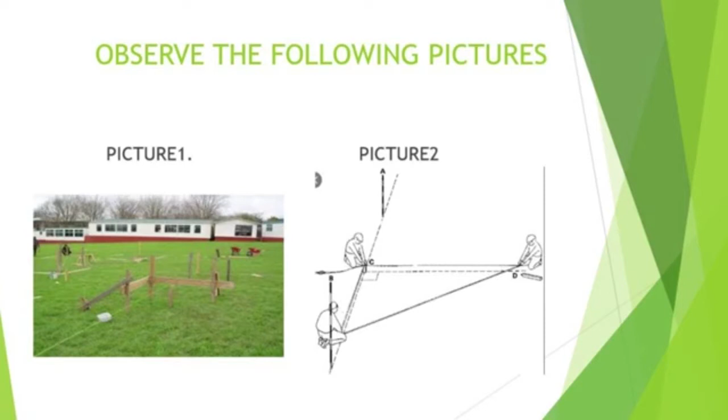Now, observe this picture in order to discover the topic of today. Here there is picture 1 and picture 2. Observe well in order to discover the topic of today. Here there is a question to answer. What have you seen on the picture? This is the first question. The second, what are they doing? On the picture, there was the pupil who is making some process. What are they doing? Can you guess the topic of today?

Now, this is the topic of today. You see that we are on the module of building setting out, competence of setup of a building. We are now on learning unit 2 called set profile. Learning outcome 5, demarcate foundation pegs and line. And the topic 1 of method used in setting out a building. Now the topic of today is set out right angle using 3-4-5 method used in setting out a building on the site.

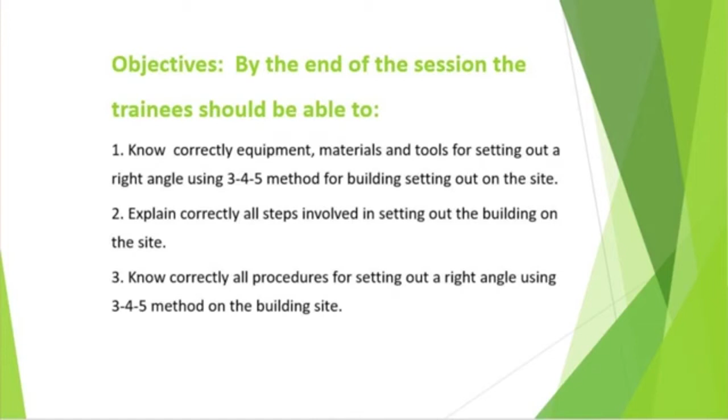So we have the objective of this session. By the end of the session, all trainees should be able to, first, know correctly equipment, material, and tools for setting out a right angle using 3-4-5 method for the building setting out on the site. The second is explain correctly all steps involved in setting out the building on the site. The third is know correctly all procedure for setting out right angle using 3-4-5 method on the building site. So I wish each trainee to cover these objectives at the end of this session.

Remember, our topic of today is to set out the building using a 3-4-5 method. Now, you can ask, what is a 3-4-5 method? There are other methods used for setting a right angle for the building, but here we have the 3-4-5 method. The 3-4-5 method is the method based on the Pythagoras theorem, a triangle. When you say Pythagoras theorem, first you must understand the triangle.

It means if one side has 3, another has 4, and the other has 5, here it is a right angle. So there is no need of using a building square, but you can use this measurement to have a right angle of your building. You set 3 at one side and 4 at the other side. Then the diagonal side will give you 5 units. The units can be meter, inch, or feet, in metric or British system. So if you use this method, you get a right angle of the building without using any other instrument. It is a matter of calculation.

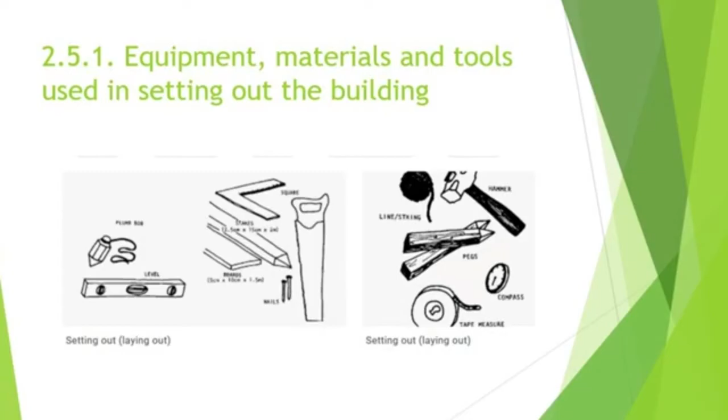So, equipment, material, and tools used in setting out the building. Here there is equipment, material, tools used in setting out a building. As you see on the picture, when we are going to set out the building, you must have several tools, material, and equipment. As you see there, building square, spirit level, pegs, tape measure, and so on.

But when you set out the building, you will cover several steps. Here, there is a general step involved for setting out a building. The first step is establish the baseline. This is the key step for setting out the building. As we will see, the baseline must be taken in the direction of the road or the neighboring building.

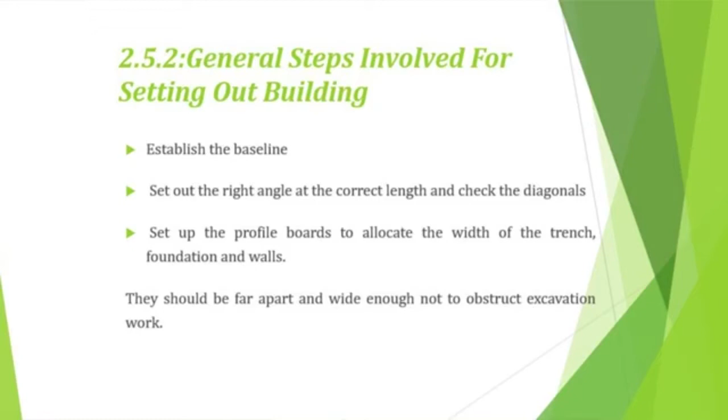The second is set out right angle at the correct length and check the diagonal. Then set up the profile board to allocate the width of the trench, foundation, and the wall. On the profile board, you have also to put the width of the trench, width of the foundation, and the width of the wall. Those are the essential elements that you must put on the profile board.

So here, there is a detailed step for setting out the building. The first step, you remember, is to set the baseline. The baseline is measured from the road. The baseline is often the building line. Remember, the building line is set by the planner or planning department of the local authority. You don't have permission to construct close to the road.

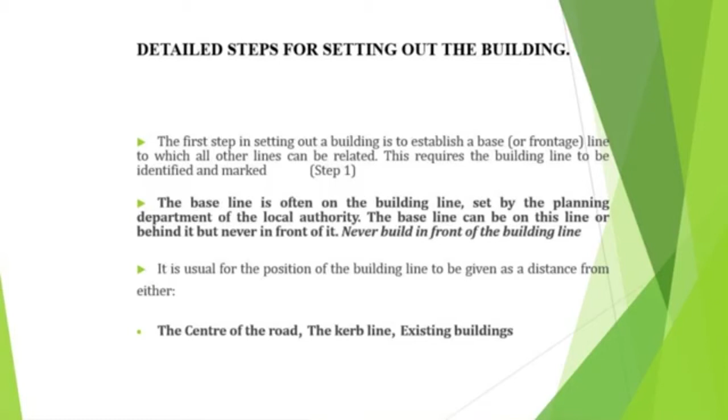So there is a planner which has the task of making decisions about the building line from the road, sometimes called setback distance. Never build in front of the building line.

You see here, it is usual for the position of the building line to be given as a distance from either the center line of the road, the curb, or an existing building. If there is no road, you must make a setback distance from the existing building.

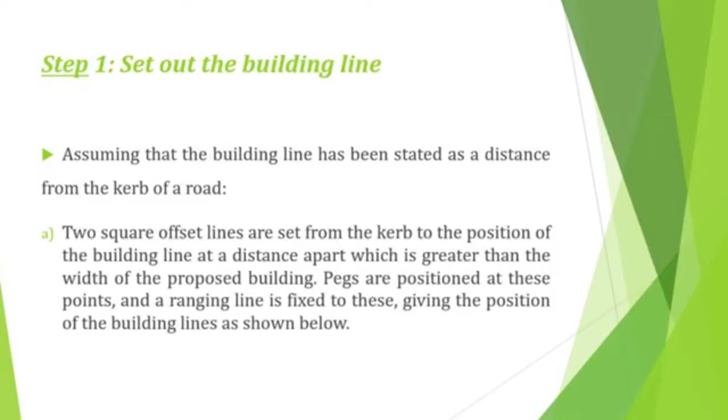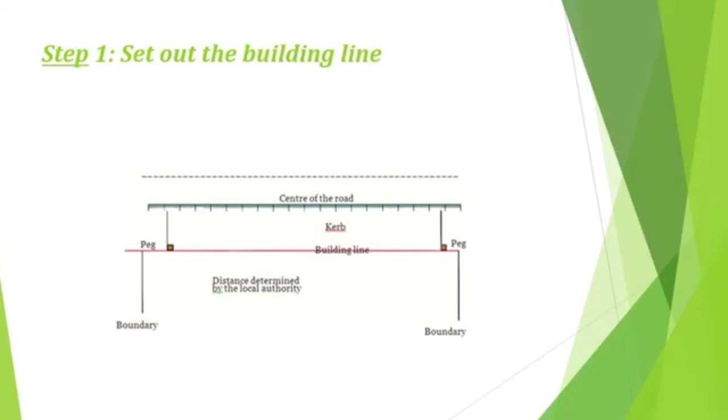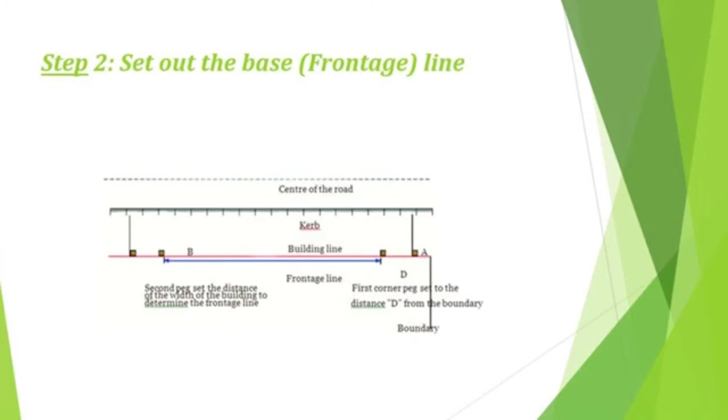Remember, step 1 is set out the building line. As you see there, the center line of the road, the curb, as I have said on this figure, it is the same. Then step 2 is set out the base or frontage line.

On the building line, this is the building line, you may set the front of your building. This is the front. Sometimes your front view must face the road. So this is now called the frontage line.

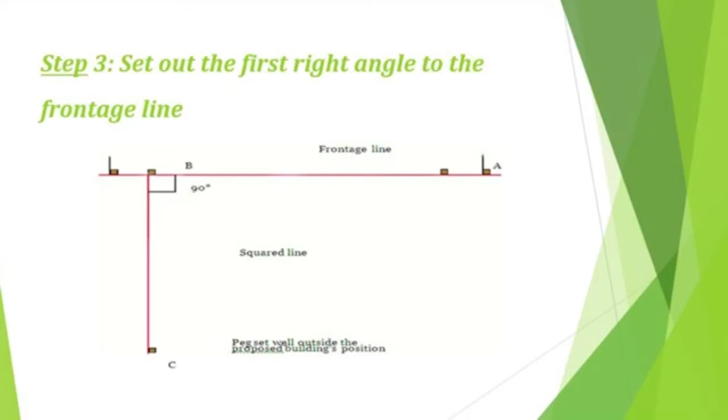Step 3, after setting the frontage line, as I show you there, is to set out the first right angle to the frontage line. It means a perpendicular line using a string or building line. So you must set here a right angle, 90 degrees.

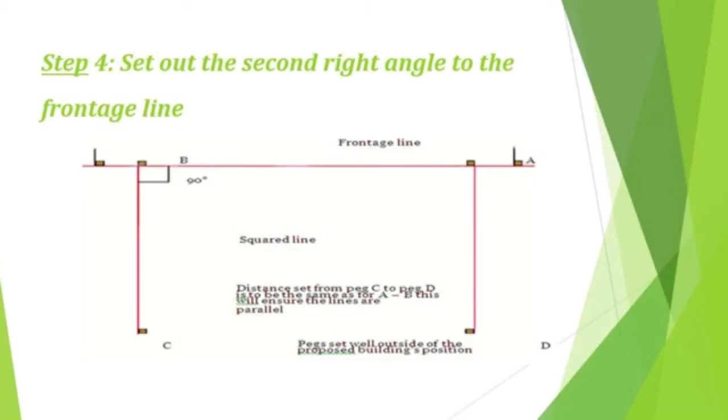The fourth step is set out the second right angle to the frontage line. Suppose the front face of your building is 8 meters. You measure from the peg here 8 meters, and then set the second right angle. This can be A and B or B and A, no problem. It depends on your right and left.

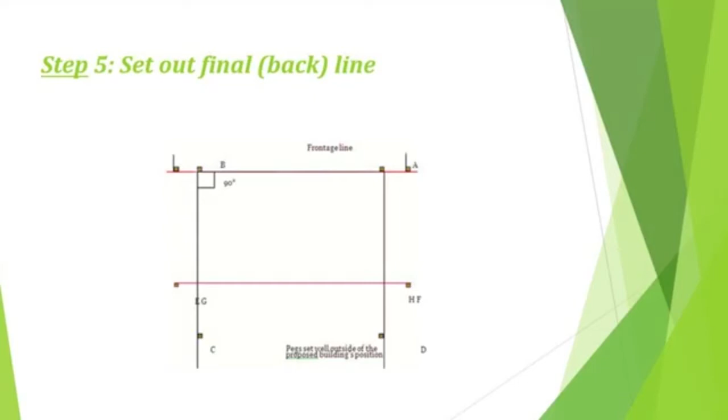And then the fifth step is set out the final back line. Remember, in the drawing we have seen the front view, the back view and side view. So the front has been set and the side has been set. Now you need to set the back.

So if your house is 8 meters by 6 meters, this line may be greater than 6 in order to set another peg for the back line. Then you measure from here 6, from here up to here 6. Then you drive a peg, and here up to here 6.

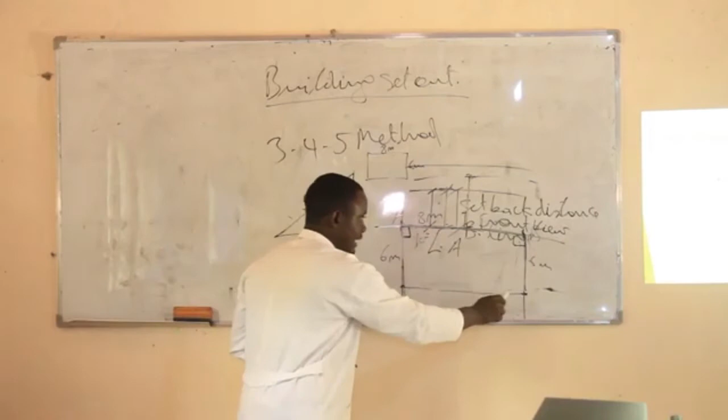Then you drive a peg, and then you stretch your string or your building line. Then you have now a rectangular shape of your building.

You have now step 6, to check the building set out for the square. You see this is a rectangle, but it does not have a right angle because you didn't use a good manner or good process for setting a right angle. Now you have to check the building setting out for the square, because you can have a parallelogram shape instead of a rectangle shape. So you have to check the diagonals of your shape. These diagonals must be equal in order to eliminate the parallelogram shape.

After checking the diagonals, you have to proceed to step 7, called set up profile and attach ranging line. This is a good step because it will help you in excavation, in foundation, and also in wall elevation. This is a step which must be done well in order to have accurate measurement for your building. You see there on the profile board, you must put the width of the wall, the width of the foundation, and also you can put the width of the trench if necessary.

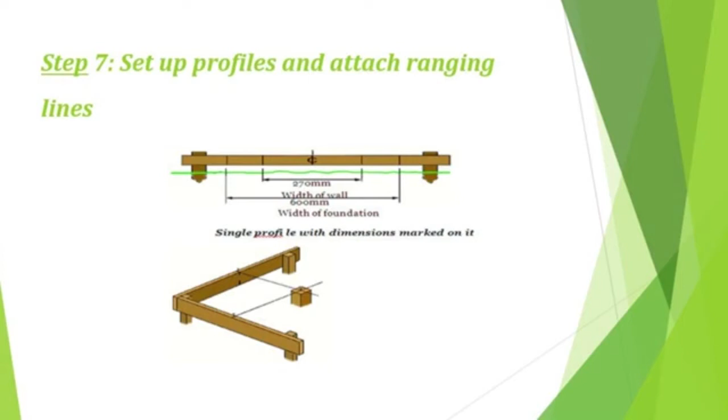As you see there, this is the single profile board and the compound or composite profile board. Now, because you can set out a building using several methods, it is necessary to mention the method that you are going to use, because there are several methods as we have said, but today remember we need to proceed with the 3-4-5 method.

Remember in the 3-4-5 method you have to measure here 4 units, and here 3 units, and now check if here there are 5 units. If you get 5 units here, it is now a right angle. Now we need to proceed with this 3-4-5 method in order to have a good rectangular shape of our building.

First, mark out the baseline from the road. Remember, you have to mark out the baseline from the road by measuring the required distance, as I have said in the first process. And then after, you have to mark a frontage line, to measure the frontage line. So as you read there, you have to put peg A and B in order to have a right angle.

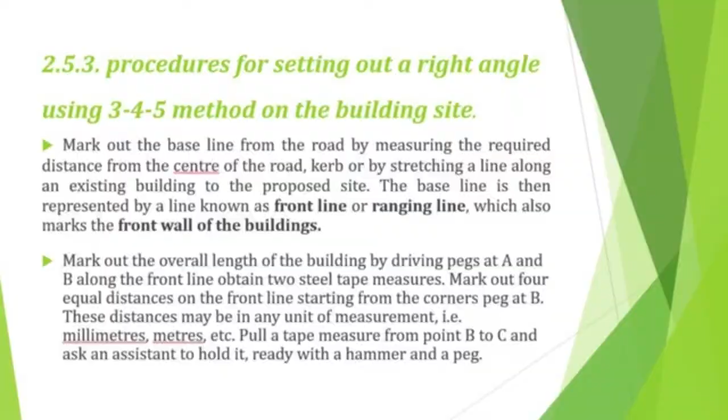This Pythagoras theorem is very essential to set out the building or to check the diagonals of your building or your right angle. So next, we will see another method that we can use in order to set out the building. Remember, today we have seen the method called the 3-4-5 method. Then next, we will see the build a square method and setting the profile board, for excavation, for foundation, for wall, in order to construct our building. So this is the end of our session. Thank you for your kind attention. Let's now go to the practice.

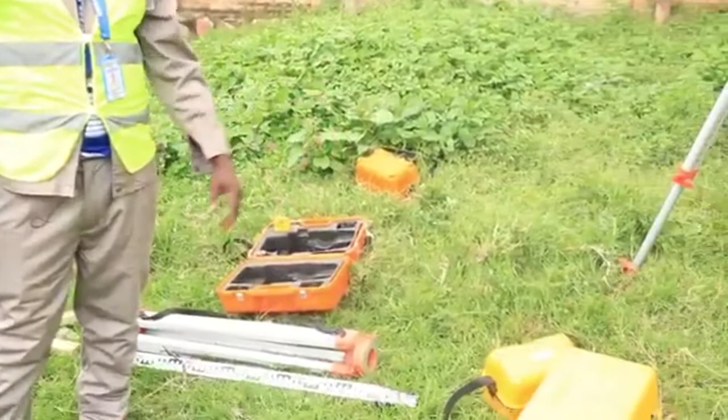Also, in another method, when we set out the building using a leveling instrument, you can use this leveling instrument. So here we have what we call an E-type leveling staff. And we have here a tripod where we fix our instrument, called either a theodolite or a dumpy level. We will see these also.

So I think it is enough. When you need to set out your building, you must use these tools, material and equipment when you're setting a building.

Setting out a right angle using 3, 4, 5 method. Let's now start making a right angle or a building using 3, 4, 5 method. Let's ask my colleague to come here and help me to measure the building or to set out the building.

Remember, the first step when you are going to set out the building, you must consider the road, either the center line of the road or the curb of the road. Remember, because we need to set or to reserve the distance from the road to your building called the setback distance, where we reach a building line. Those distances, remember, are determined by the local authority planner.

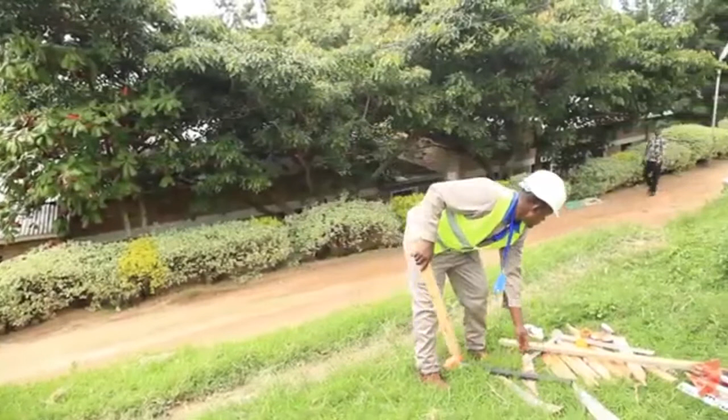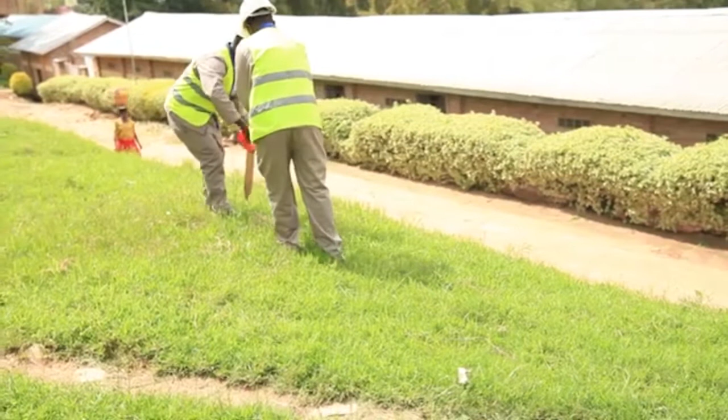So let's now start. Suppose that the distance here, setback distance, let's now take 1 meter as a setback distance. Mr. Emil. No, let's take 1.5. 1.5 meter as setback distance. Emil. Let me see, 1.5. 1.5 meter from the curb. Yes.

So now this is the building line. You have also to fix your string. This is a building line where there is a distance from the road, curb of the road, and your building. Remember, never build in front of the building line. On this building line is where you can take the front view or the front face of your building.

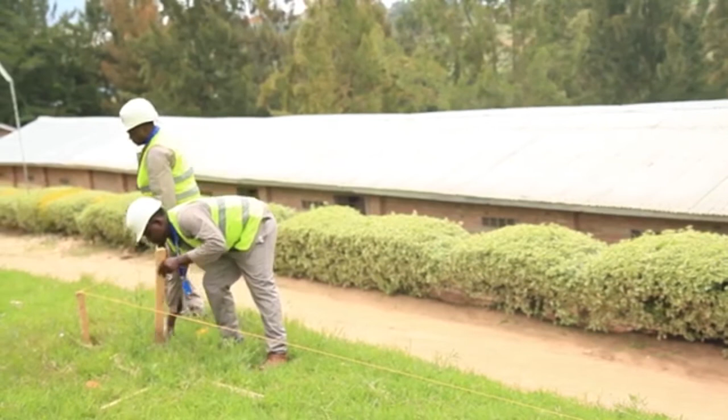Remember, we have a building of 5 by 4. It means it is a rectangular shape building that you are going to set. Then you can put a peg that will locate your face of the building. From here, now this is the first peg that will show you the face of your building. Peg 1.

Your peg must set vertically. This is peg 1, which will show you the front face of your building. Because we have a tape measure which starts from 1 meter, let's start here because 0 was not there. Yes, take there, take that please.

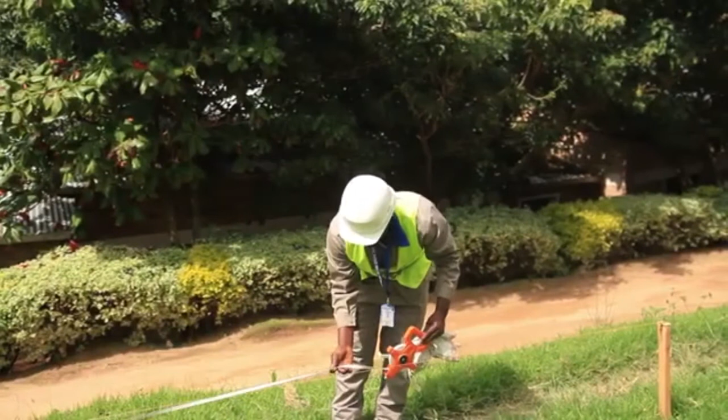It means because I start from 0, then I start from 1. I will measure 6 in order to gain 5. Now 6 is there. No problem. It's enough. So nail. No. Take the tape measure. Only 1 meter. You see that this is 6, but it means 5. Now you have the front face or front view of your building.

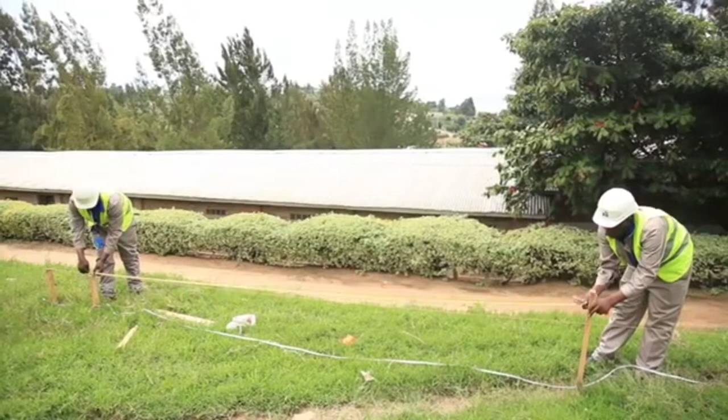Let's now set a right angle using 3-4-5 method. On the front face you have to measure 4 meters. Peg at 4 meters, 4 units. Yes, 4 units here. Yes, 4. Just come here. Go there. 4 units. No, I have it. The point is this, but on that string. Yes, 4 is there. We have now driven this peg simply.

So it means this is 4 units. 4 on that side. Then also you need to measure now on the other face 3. There. See, but in order to gain 5, take the tape measure, this tape measure, in order to gain 5. Me? No. Go and bring it. No, there.

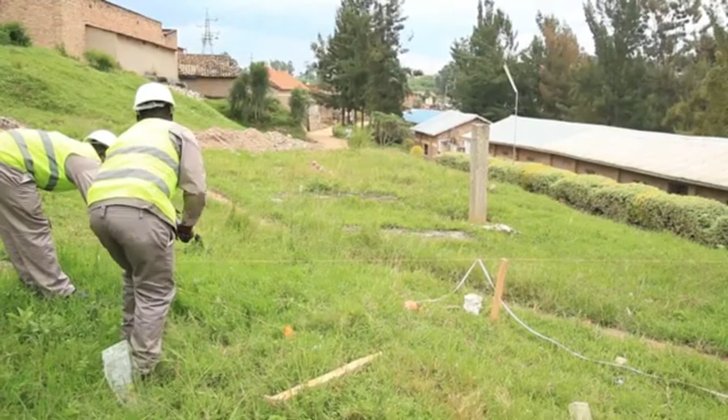If you don't agree, you can check with a building square. 3, 4, 5 is a good method for measuring or setting a right angle. Three, 4, 5. Yes.

Let's now verify after fixing. Come here. Enough. Go there and verify the diagonal of 5. 3, 4, 5. Here I did not need it on this peg. Is it? Yes, only 1 meter. Then you have to check if 3, 4, 5 is there again. It means it is there. 3, 4, 5 is there.

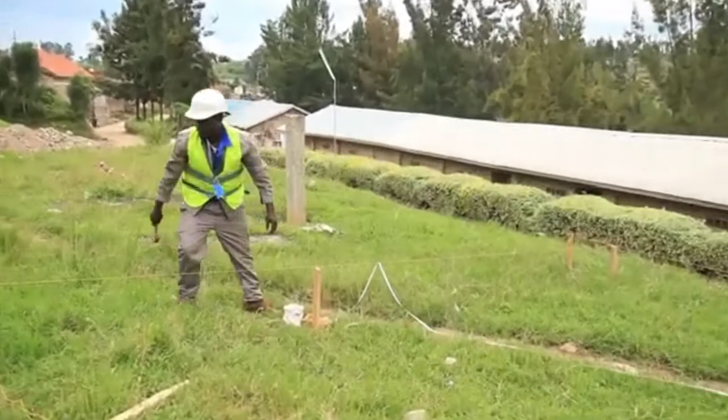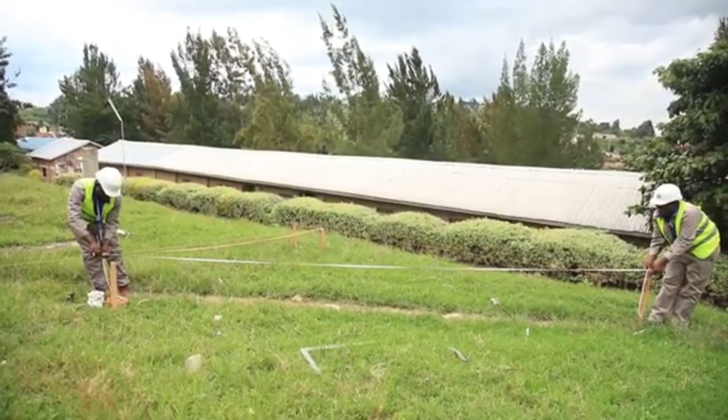See, the peg was set badly, so you have to set it well, like this, and this must pass here on that peg. You can now verify again. Now there's a 5 and 3. It is there. Good. It is now a right angle. If you don't agree with this 3, 4, 5 method, in order to check a right angle well, you can use a building square to check. But this is the best.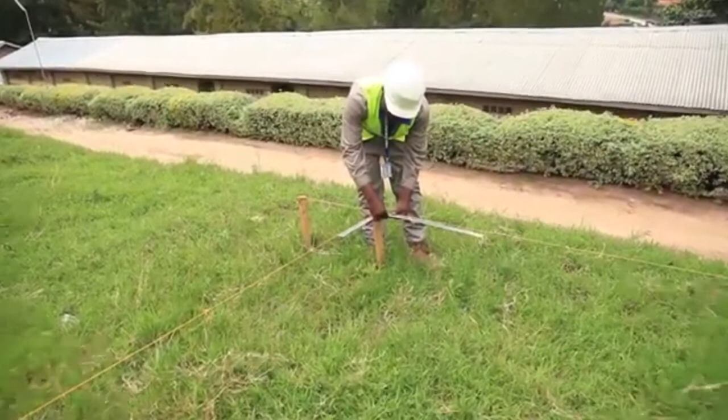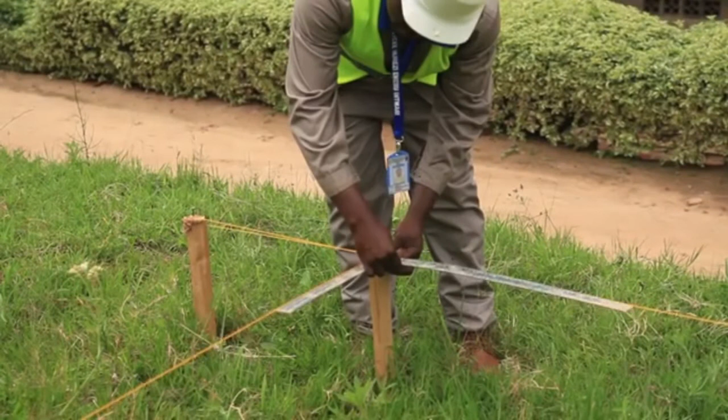Let's now check. See there? You see that there is a right angle. Right angle is there. You see there? So this method is correct. So now we have set 3, 4, 5. And then from there you can set the other face of the building.

Remember, we need to set a building of 5 and 4. Then you have to measure. You have now to set another face or another right angle. It means now this peg is now unused. Also this. So you go to measure another right angle. Again, you have to put here 4. 4 is there. Hammer.

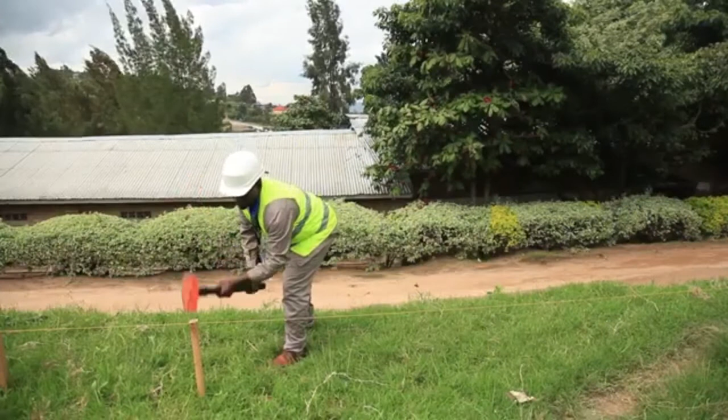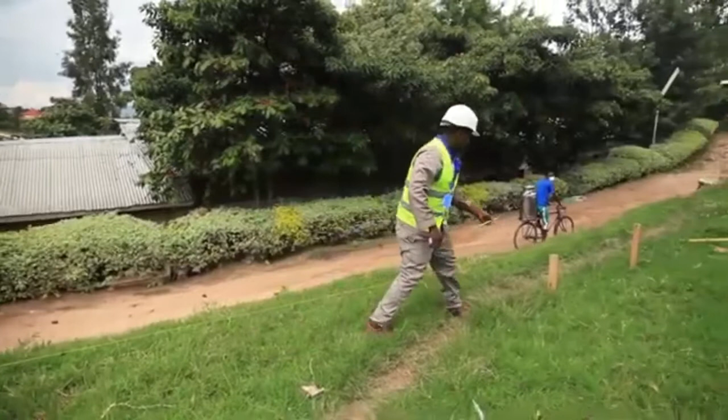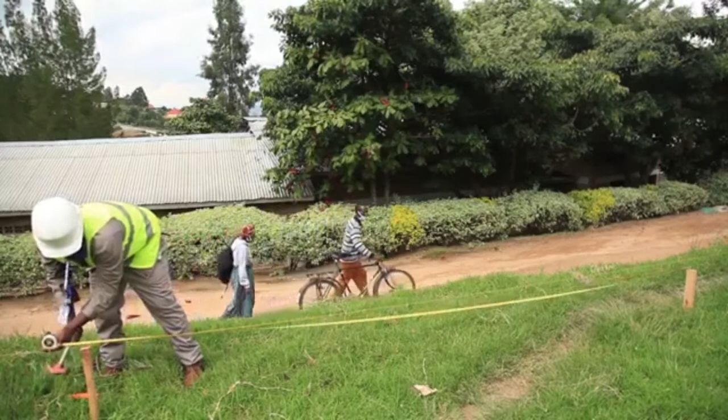So a big hammer, stone hammer. Remember, we are on the step of making the second right angle. Second right angle. Nail. Second right angle. Where there is 4. Four is there. Four is there. Then another 3 and 5. Remember, 3 and 5. You have to measure 3 and 5.

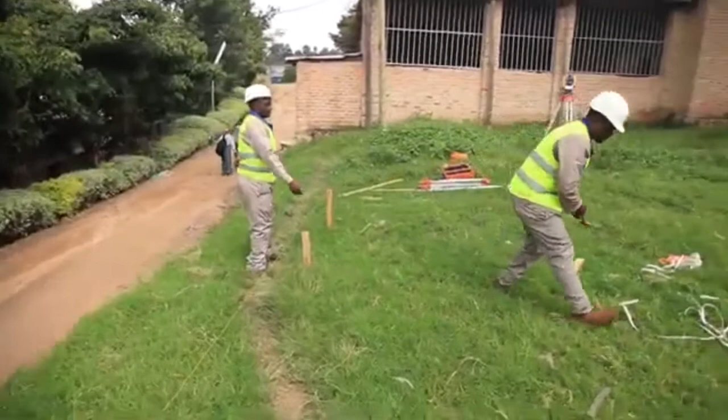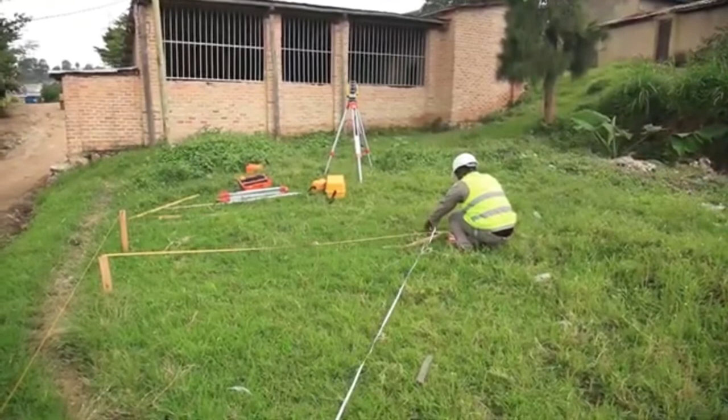Where 3 meets with 5. There. Where 3 meets with 5. It means here is 5. Here is 5. Then I need to measure 3. 3 is there. 3 will meet with 5 there. So you must drive in a peg here. Drive a peg here where 3 meets with 5.

Now it is a right angle. This is a right angle there. Let's check again. See, then 5 and 3. Then I drive a nail where there is a meeting point. Now, this is another right angle. So, let's fix a string there. Let's fix a string.

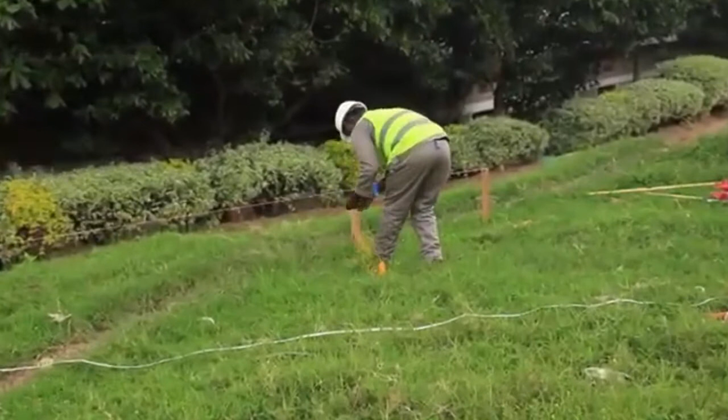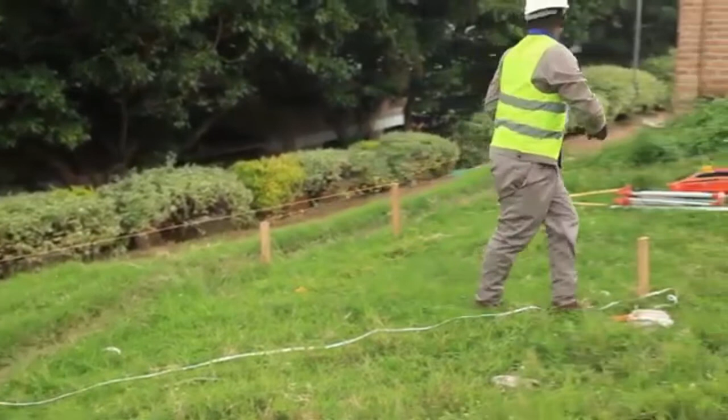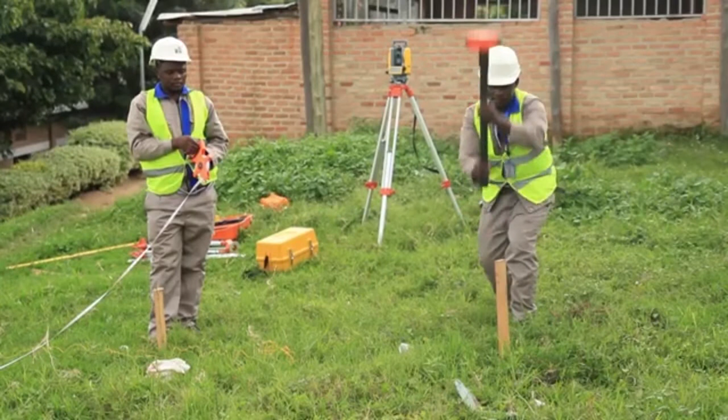Come with a peg. This peg will guide you where you will put another peg. Yes, no, yes, no. Inside, yes. It is there, where there is a peg for building setting out. Yes, so you have to fix another nail, with the guidance of the 3, 4, 5 peg. See there? It is a good peg. It is like that.

Now we fix that. You must fix it well where your string or building line is, and then it means here we have a front face or front view, side view, and other side view. Then you need to measure your back face. So the back face, remember, is equal to the front face. Go there, to see if it is equal. No problem. There.

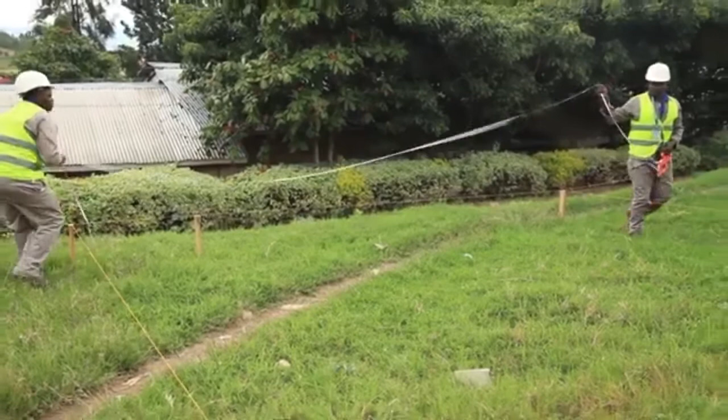Remember this tape measure starts with 1. The tape measure. So it means there is a parallelogram. So we need to remove this parallelogram, to see the front. Go there. No. Other peg, no. Yes. Now this is 6. No, 5. Yes, good. And then you will need also to check. Put there. If it's 6, there are a few meters, then a few centimeters.

Then we have to measure also 4. Where is the measure? Remember, we have a building with a side of 4. Remember, this is no longer used because the right angle is now set. Then 4 is there. Start again. Take the tape to measure 4. This is 4. Now this is 4. Another 4 here. Four is there. It's not.

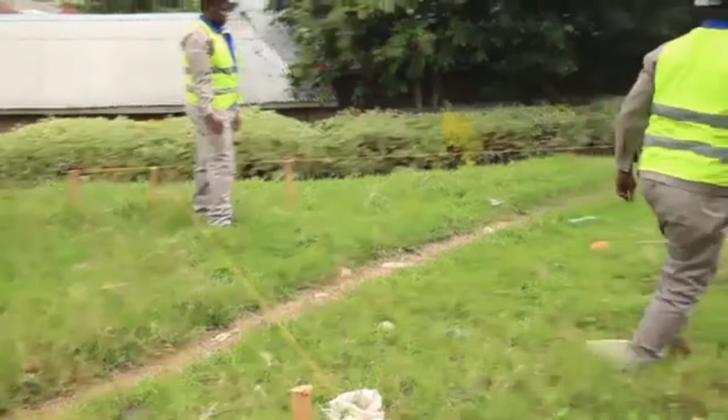Until below the string. Below the string. Then 4. Come with a nail. Four is there. Yes, good. And then, where is the tape measure? Another 4. Another 4 is there. Then it means we remain with a rectangular shape.

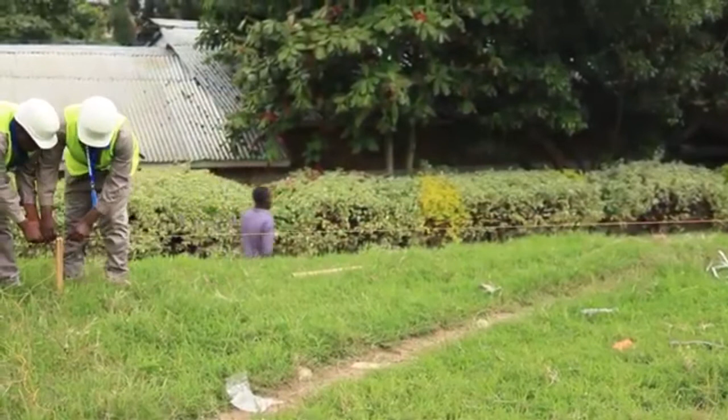Now let's remove another peg. Wait. Remember, these are the 3, 4, 5 pegs. Now they are useless. It is too small. Check another. If the string is too short, you have to add another string.

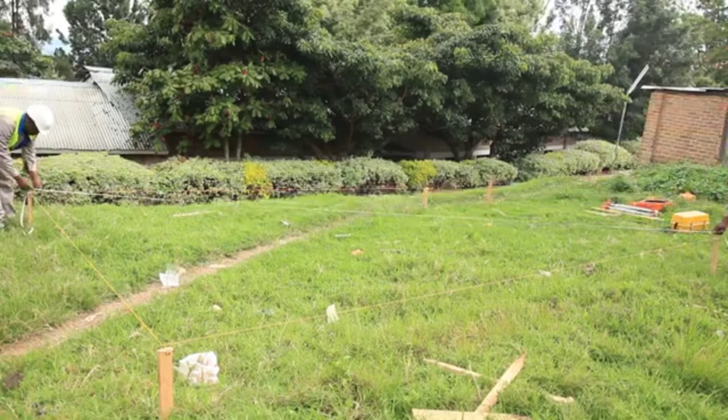You have to check the diagonal. If there is 6.4, you see, this is 6.4. Go there. Now, this is 6.4. So now this is a well-set building if the diagonals are equal.

So after setting the right angle of your building, you also need to set the profile board, which comes here and here in order to show the trench width, foundation width, and the wall width. So the next session, remember, is about the building square method with a profile. Next you will see how to set the profile on your building.